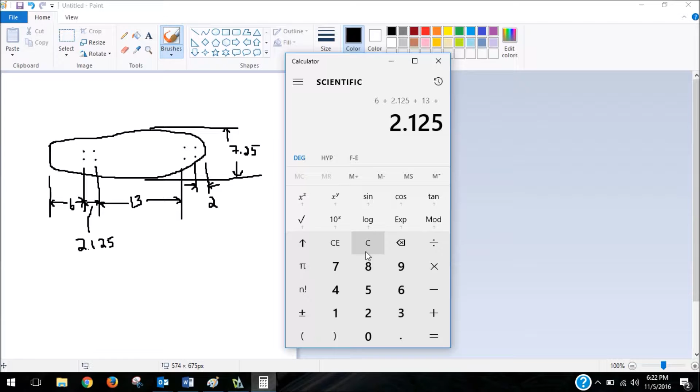So this distance from here to here in both spots is going to be 2.125 inches. So we can quickly add that all up. So 6, which is our tail length, plus 2.125, plus 13 inches, which is our wheelbase, plus another 2.125 at the nose for those bolts. And then lastly, the nose length, which is 2. So our board length is 25.25 inches. So I'm going to write that down.

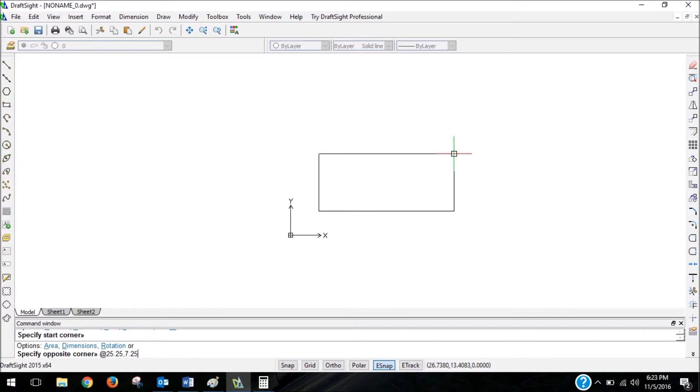And I'm going to make a rectangle that is 25.25 by 7.25. Next, I'm going to draw a line that cuts through the middle of this rectangle by snapping to the midpoints of the left and right sides. And the reason I'm doing that is because we're only going to make half of the skateboard. We're only going to make the top half. We're going to then mirror that half so that we get a whole skateboard without having to draw the same thing twice. So it's a nice shortcut we can do.

Next, I'm going to draw some reference geometry. Reference geometry is just lines and other shapes I'll draw and later delete simply for making it easy to put in the features I really care about. So I'm going to make a line at my tail length and a line at my nose length. So I'm going to make a line that's 6 inches from the right side and a vertical line that's 2 inches from the right side. So I think I might have misspoke there. 6 inches from the left side and 2 inches from the right side.

So I'm going to start at this point. I'm going to go out 6 inches, so at 6,0. Down here. And then I'm going to do the same thing on the nose, but change it for the appropriate dimension. So that was 2, so I'm going to go at -2 because I'm going to the left, 0, and snap to here.

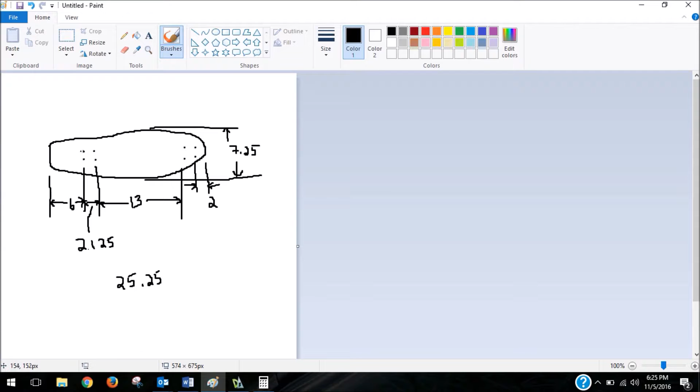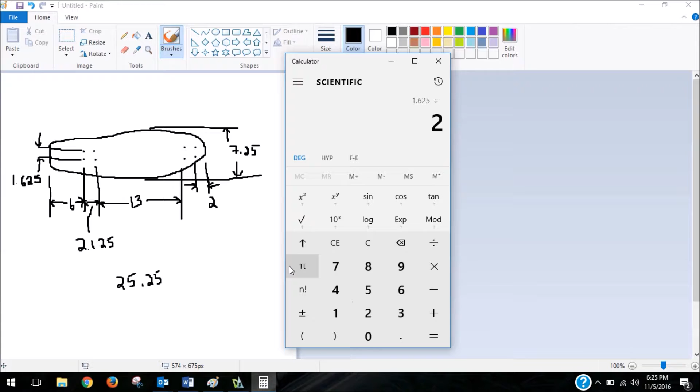Alright, the next thing I need to do is make the geometry for my bolt holes. And again, we're missing another piece of information. We don't know the width of the bolt holes, what that bolt pattern distance is. So we actually do have that information though. So this distance right here is 1.625. And since we're cutting through the middle of this, we're going to make a line that goes only half this distance up. So we need to calculate what 1.625 divided by 2 is. So 0.8125.

And if that doesn't make sense just right now, you'll see how that basically gets doubled when we mirror the object. So let's create a line that starts here and then goes up 0.8125. And it's going to go out 2.125. And I'm going to do the same thing, a mirror image of it on the nose line.

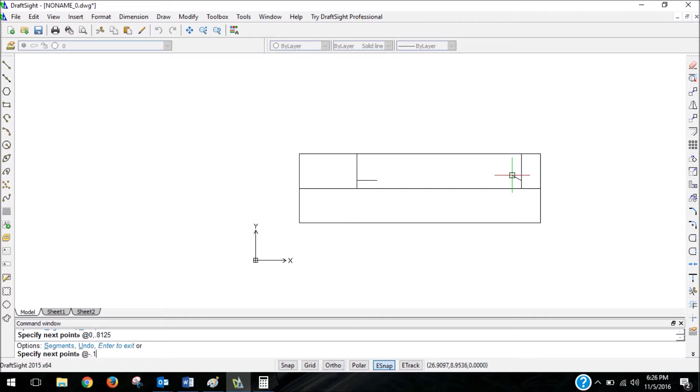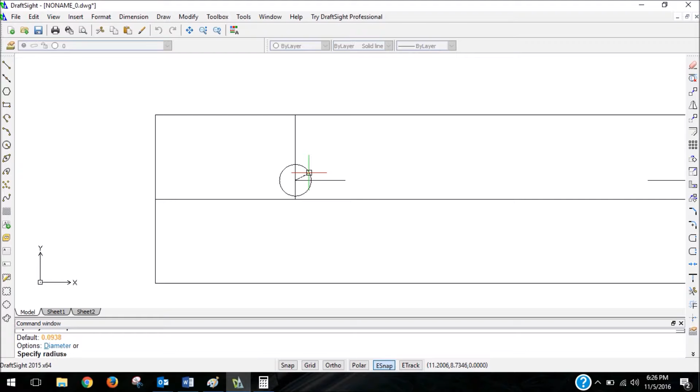Next, I can position my bolt holes, and I'm going to use a circle tool, and I'm going to dimension that with the 3/16 inch standard diameter of bolt holes. And a nice little helpful tool we can use here, instead of making 4 unique circles, we can use the copy paste function. So if I click on this circle and then type copy into the command window, hit enter, it'll ask me to specify a from point. So that's just going to be the middle of the circle.

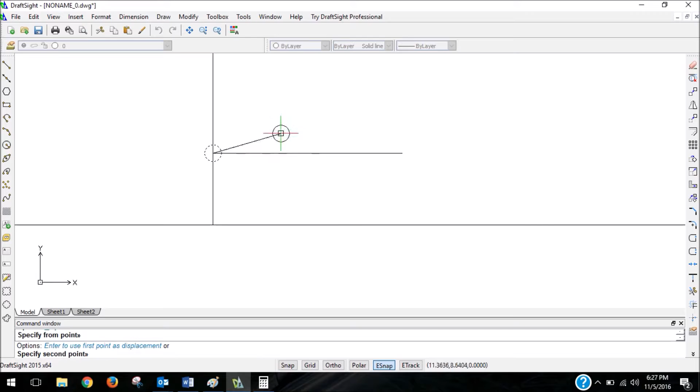And now you can see I basically grabbed that circle in the middle and I could make copies, and I'm basically using that from point as my snap point. So I'm going to put one here at the end of this line. I'm going to put one here and then a final one here. I can hit escape to get out of that, and then I can delete this initial reference geometry.

Next, I need to make the curved part of the board. I'm actually going to hold off. There's one more thing I'm going to do before I do that, which is make the flat side of the tail. I'm going to take care of all the flat edges first. So if you notice, our tail has some flatness right here. The edge of the board is flat.

And this is really up to you. Of course, all these dimensions are up to you, except for the bolt pattern dimensions. But I'm going to say that I want it 4 inches wide in the back here. So in that case, I'm going to come up 2 inches from this point.

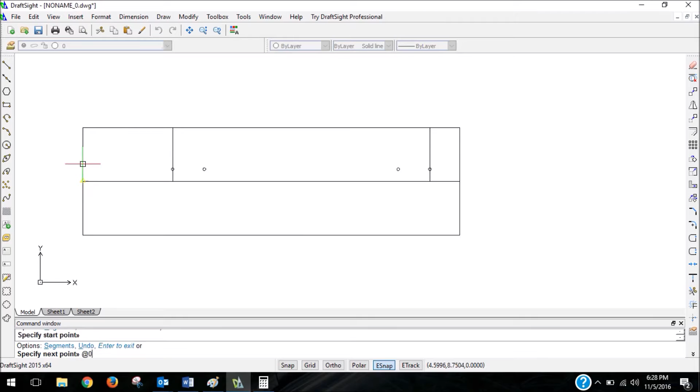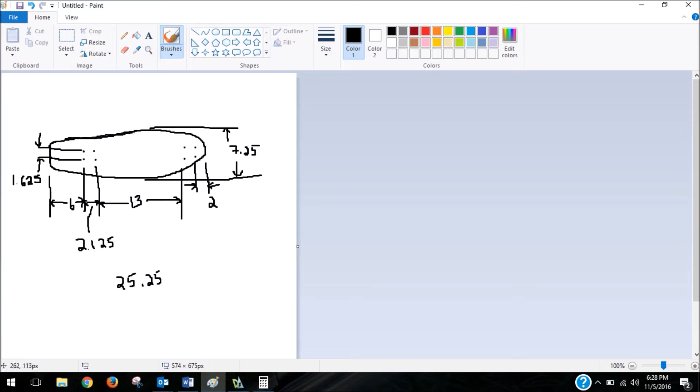And there's actually another kind of a straight edge that I'm going to use here, which is from this corner right here, which is rounded. We're going to take care of that roundedness later. But this line basically right here, this is basically a straight line up until this point. So let's make that just a simple straight line. And I can position that really wherever I want. I'm going to use the E track and E snap to find a good spot for that. And I could always change this later.

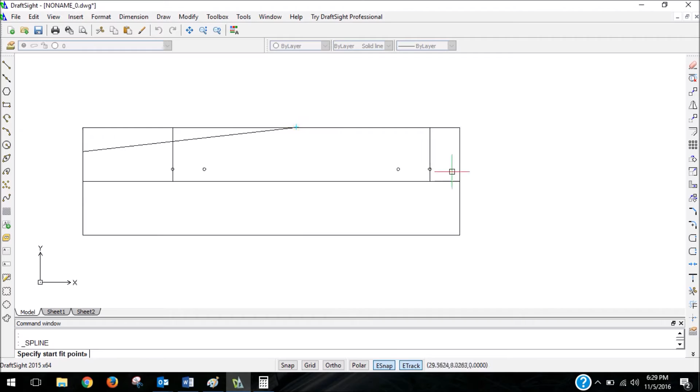And lastly, I'm going to use the spline tool to basically finish off this curve. And if you don't know how the spline tool works, there's a separate video just on how to use that, so you can practice and watch that video before you get started with your board.

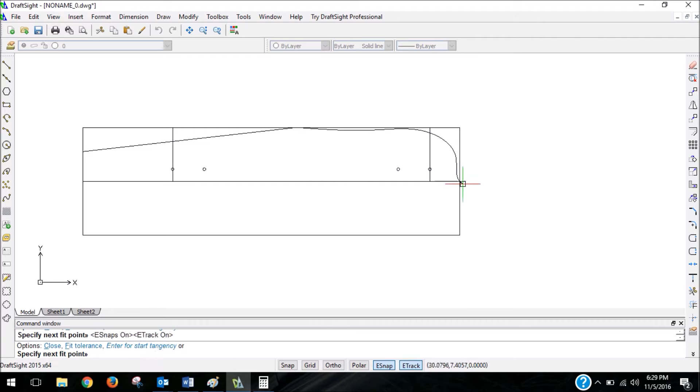I'm going to turn off the E snap and E track. And I'm going to make several points. I'm going to start with just 3 points and see where this gets me. For the start tangency, I'm going to be horizontal, and the end tangency is going to be vertical. And so far this is looking pretty not good, but thankfully we can adjust it. It might take a little bit of playing around for you to kind of get the shape you're looking for.

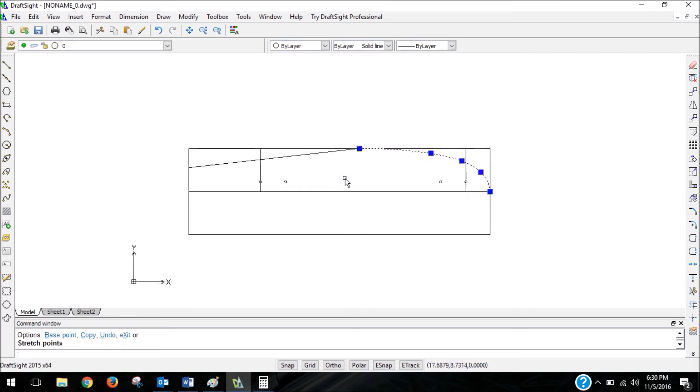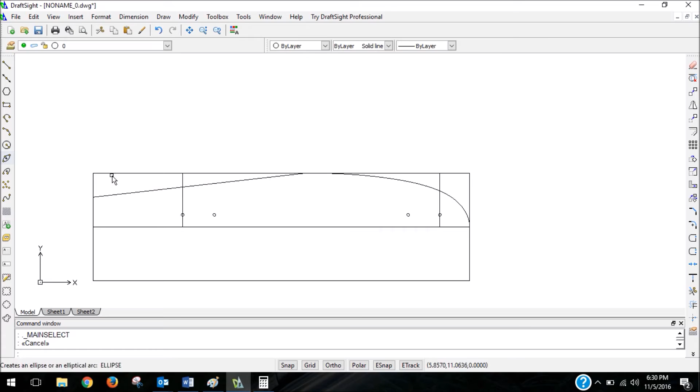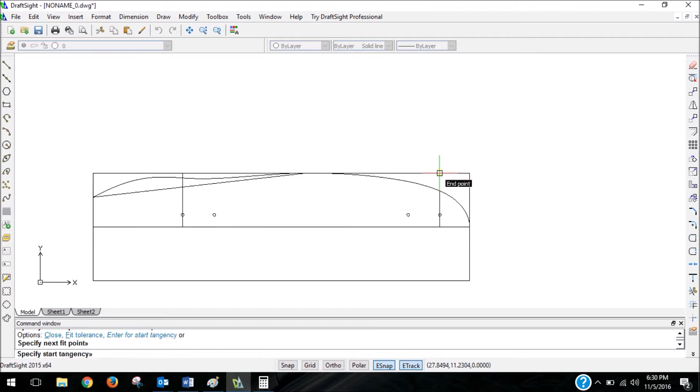And you know what? I'm not a big fan of this straight line here. It looks a little off. So what I'm going to do is I'm going to replace that with another spline. I'm going to leave it in place for right now though. So I selected the spline tool, turn my E-snaps back on. I'm going to use 2 points, and then I'm going to place the final point. Start tangency is again going to be horizontal, and the end tangency is going to be vertical.

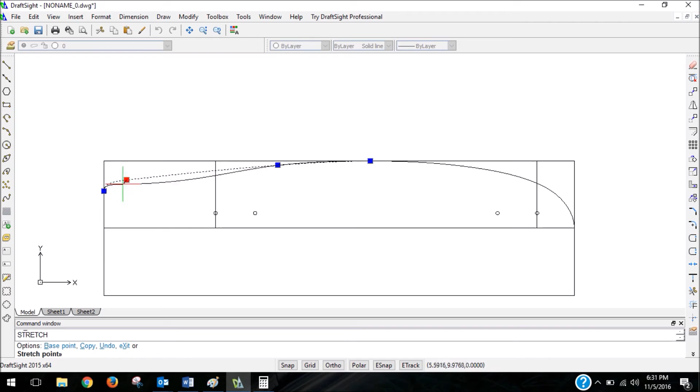Let me get rid of this straight line, so I click on that and hit delete on my keyboard. And this is starting to look a little bit better. Actually, that looks just about right. So let's go ahead and delete some of the reference geometry to clean this up a bit.

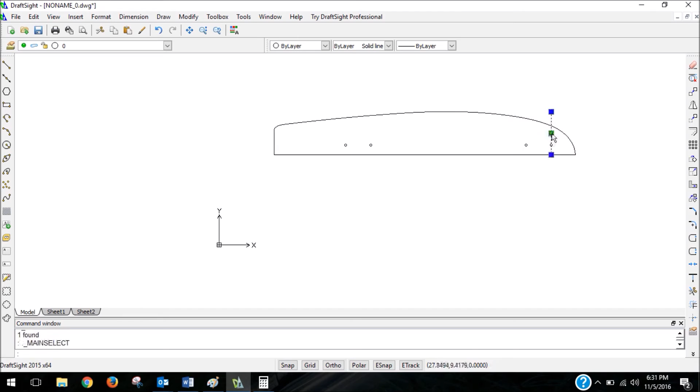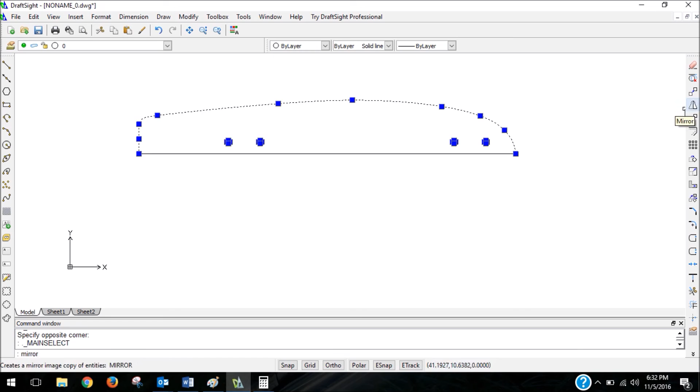Next, I'm going to select this entire drawing, everything I've created, and then deselect the horizontal line that cuts through the future middle of it. Right now it's not the middle of it because I only have a shape on one side. I deselect by holding down Shift on my keyboard and then clicking on the item I want to deselect. Next, I'm going to type in mirror into the command window. There is a tool for mirroring off to the right side here. I just have a habit of typing it in, hit enter.

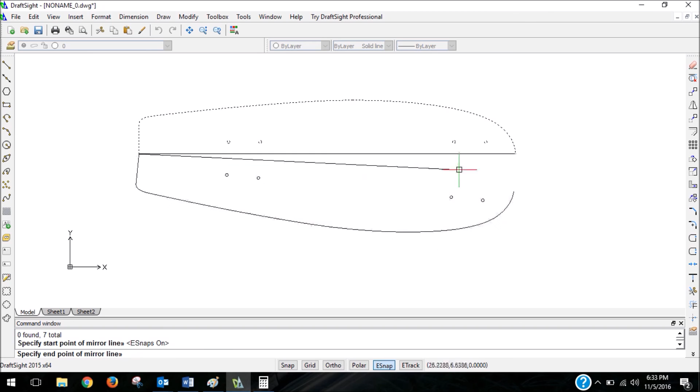So if we look at the command window, it says to specify the start point of our mirror line, and the mirror line is the axis about which we mirror our object. So it's basically going to be the future center line of our object, and we just happen to have that drawn already. So I'm going to turn my E-snap back on and select the left point and then the right point, because now it says to specify the end point of the mirror line of that center line.

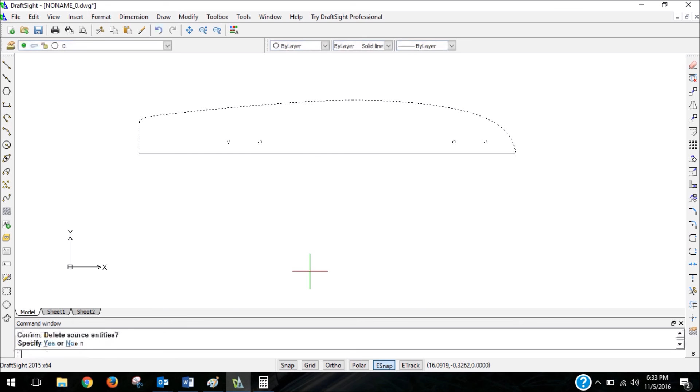Now it's asking me in the command window, delete source entities. I do not want to delete the initial parts I selected because that would just leave me with the other half of the board. So I'm going to hit no because I want to keep the original entities. And I type N because the N in no is underlined in that prompt. And now I can go ahead and delete this line. And now I have my cruiser board.

So good luck with creating your board, and have fun and play around with the spline tool to get your shape just right.